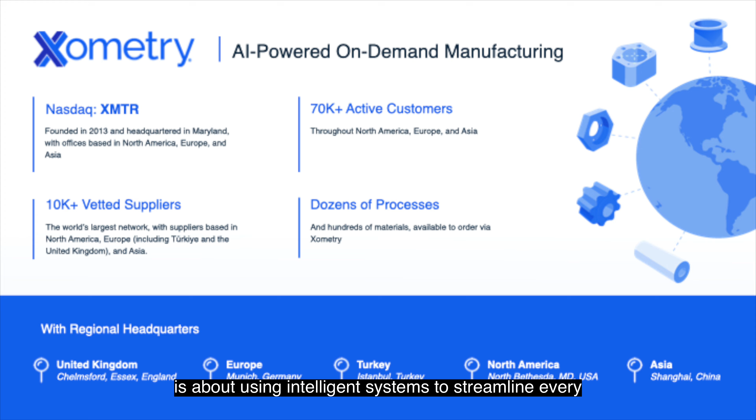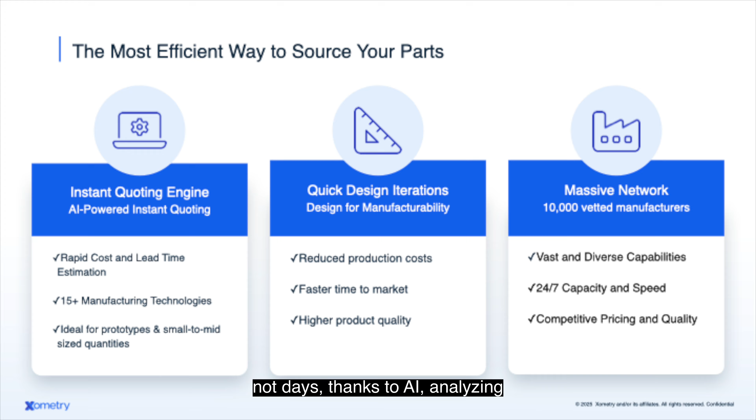At its core, AI-powered manufacturing is about using intelligent systems to streamline every step from quoting complex parts to production of high-volume series production. Platforms like Xometry use AI to connect engineers with manufacturers located all over the globe, making the process incredibly efficient. Engineers can get accurate quotes in seconds, not days, thanks to AI analyzing your CAD files and producing instant pricing based on thousands of historical data points.

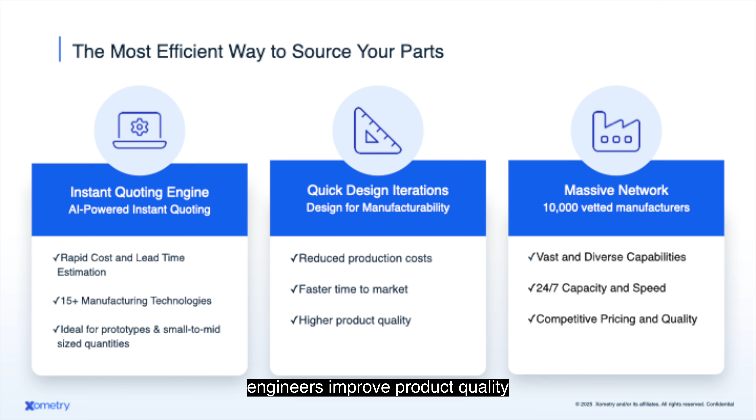AI-powered manufacturing platforms can also help engineers improve product quality and detect and rectify design faults at an early stage with their design for manufacturability feedback.

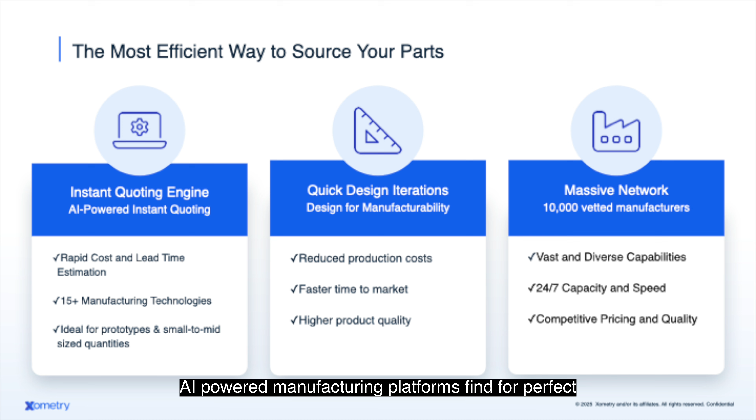AI-powered manufacturing platforms find the perfect partner for your project based on the project's complexity and manufacturer's capability, thus speeding up the lengthy and manual process of finding a supplier.

This isn't just about speed, it's about making smarter decisions that streamline your projects. AI-powered manufacturing frees up engineers to innovate and to focus on designing and engineering their big ideas.

So we've learned about the potential of AI manufacturing, but how do we turn that potential into reality? To answer that question, I would like to share with you the story of the Hilo One e-scooter, a project I'm really proud of, as I was the account manager and played a key role in delivering this successful project.

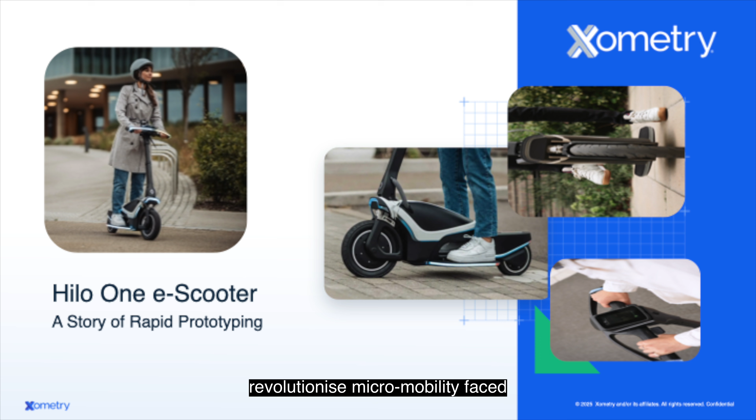Hilo EV, a startup aiming to revolutionize micro-mobility, faced the challenge of producing high-quality prototypes with a tight time frame for a major industry show.

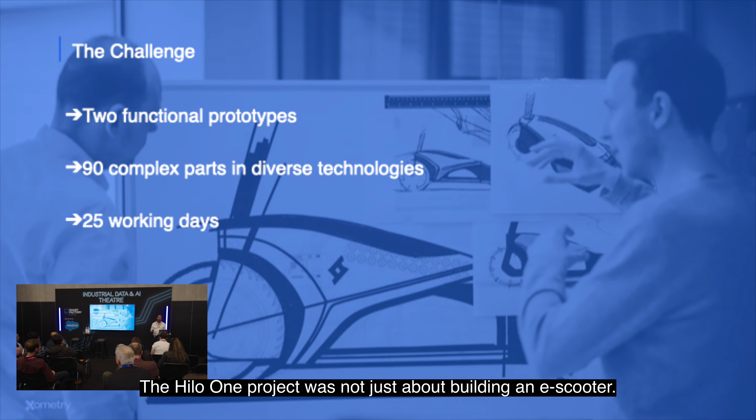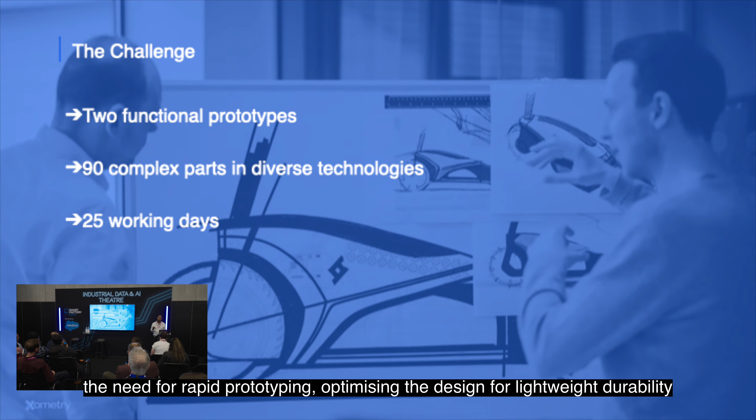The Hilo One project was not just about building an e-scooter, it aimed to create a high-performance solution for urban mobility. The team at Hilo faced significant obstacles, including the need for rapid prototyping, optimizing the design for lightweight durability, and ensuring cost-effective production.

With the goal of unveiling their innovation at a major trade show, they needed to develop 90 complex parts across 2 prototypes in just 25 working days. This ambitious timeline required a new approach to sourcing manufactured parts, one that could accelerate their product from concept to reality.

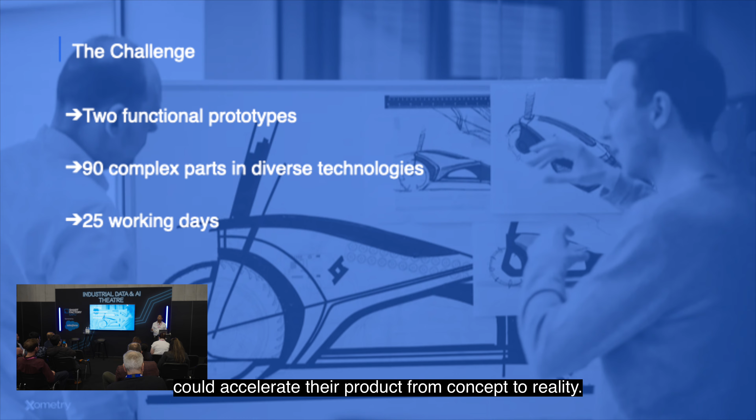The Hilo EV team turned to Xometry, leveraging our AI-powered platform and extensive manufacturing network to instantly connect with manufacturers who possess the right capabilities and experience to produce parts with the high quality and post-processing finishes that they required. By utilizing Xometry's resources, the Hilo team could effectively tackle the complexities of their project and ensure that the 90 parts met their rigorous standards for quality and performance.

This collaboration allowed them to streamline the production process, significantly enhancing their ability to meet tight timelines without compromising on the durability and quality.

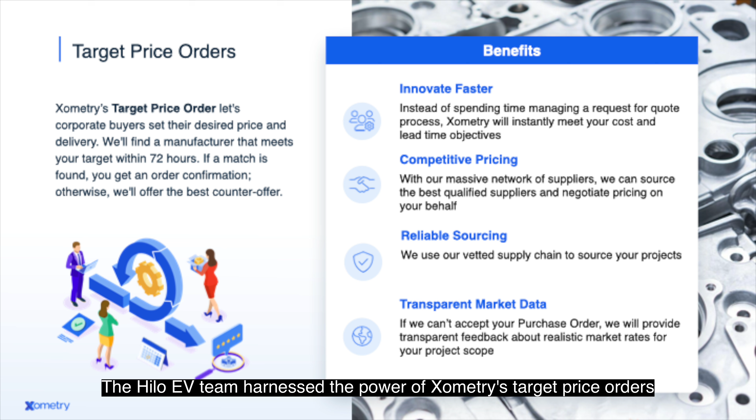The Hilo EV team harnessed the power of Xometry's target price orders, a game-changing feature designed specifically for corporate customers. This tool empowered the Hilo EV team to take the reins, allowing them to set the target prices for their parts and maintain complete control over their project budget.

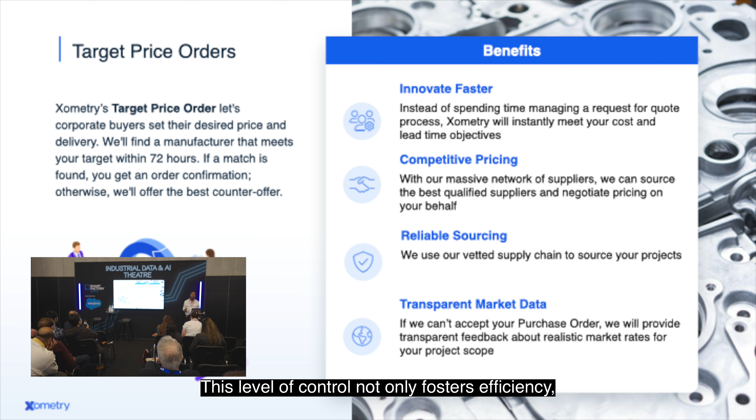Imagine being able to benchmark the cost against market prices from previous projects or competitor offerings. With target price orders, that's not just a dream, it's a reality. This level of control not only fosters efficiency, but also opens the doors for innovation and collaboration in manufacturing.

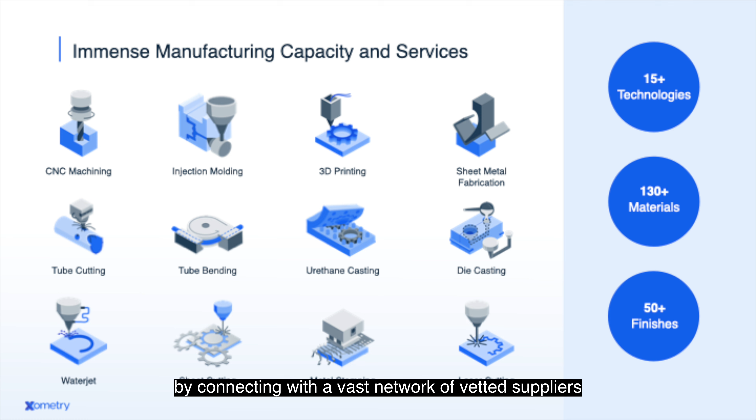The Hilo EV team was able to rapidly prototype by connecting with a vast network of vetted suppliers and accessing multiple advanced technologies simultaneously. With the help of Xometry, the Hilo One e-scooter components were produced using various technologies, including

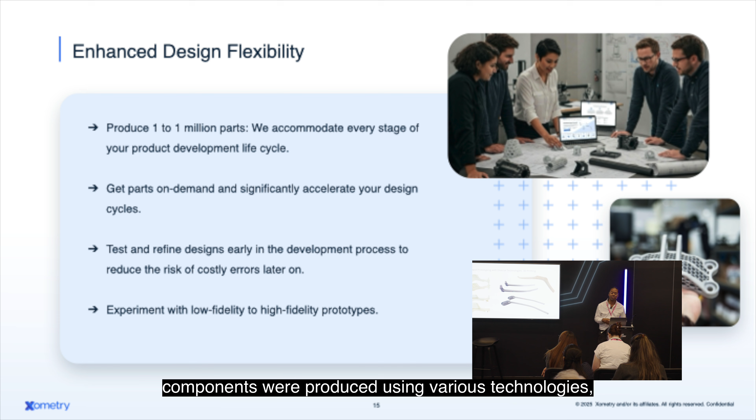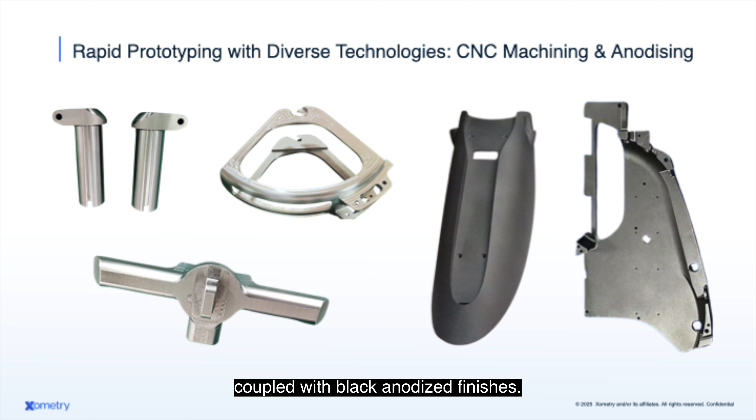3D printing SLA for high-resolution transparent parts, SLS for durable nylon parts, and CNC for precise stainless steel and aluminium coupled with black anodized finishes. Together, these all formed the body of the e-scooter.

So the Hilo EV team came to us with a vision to create not just an e-scooter, but an iconic, dynamic mode of transport. They needed precision, speed, and reliability in their manufacturing process to bring their sophisticated design to life.

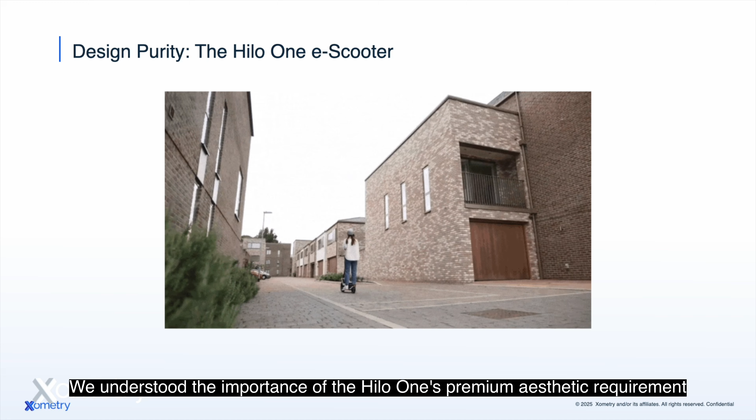We understood the importance of the Hilo One's premium aesthetic requirement and its focus on safety, and we helped them to navigate the complexities of manufacturing, allowing them to focus on what they do best, designing a revolutionary product.

By leveraging Xometry's AI-powered platform capabilities, the Hilo EV team were able to achieve their goal of creating an e-scooter that was not just visually stunning, but also safe and reliable.

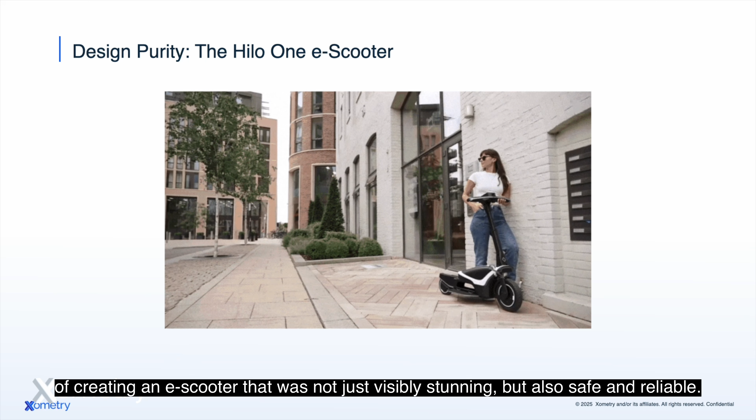We were thrilled to be a part of their journey, and we're committed to continue and supporting innovators like Hilo EV bring their groundbreaking ideas to market.

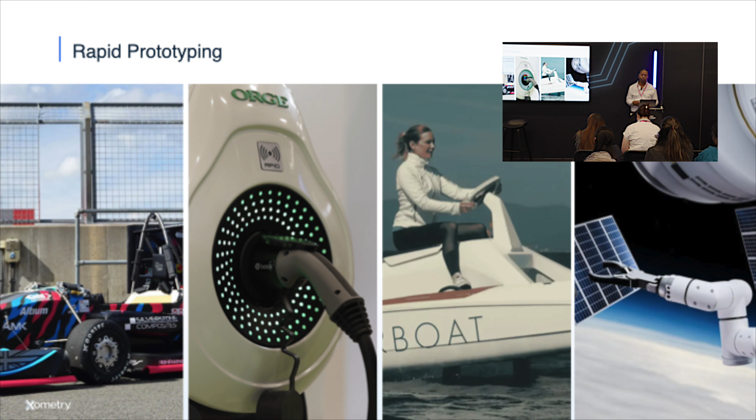Now let's talk about what this means for you, the engineers, and how does AI-powered manufacturing change your day-to-day work? And how does it accelerate your projects? The answer lies in the significant advantages it offers around efficiency.

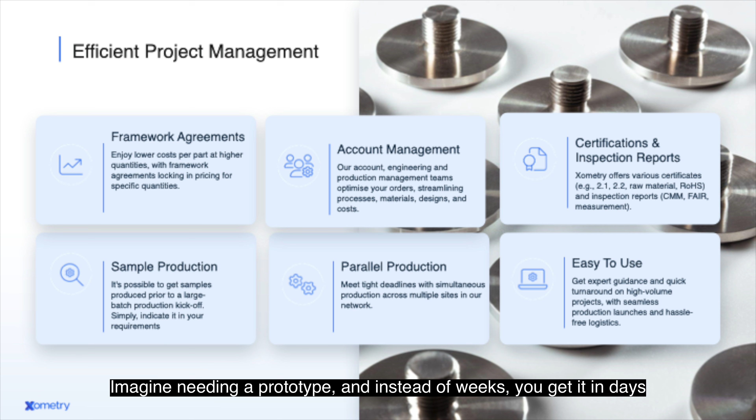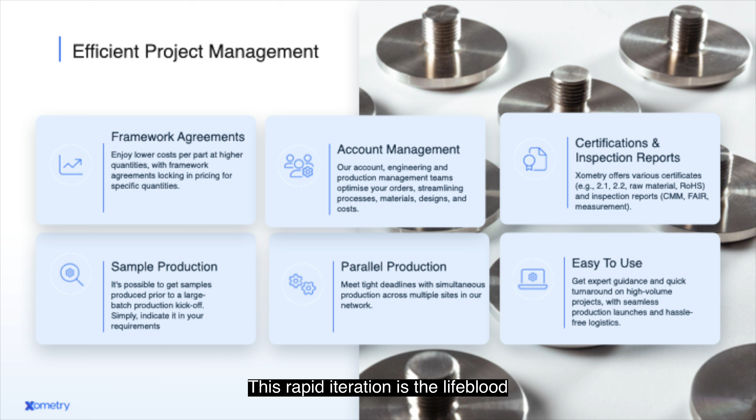Imagine needing a prototype, and instead of weeks, you get it in days, with access to a diverse range of manufacturing technologies like CNC machining, 3D printing, all from a single platform. You can accelerate your prototyping process. This rapid iteration is the lifeblood of innovation, allowing you to quickly test and refine your designs.

So time is a critical factor in any project, and AI-powered on-demand manufacturing platforms streamline project management by reducing lead times through automation and efficient supplier management. With access to over 10,000 vetted manufacturing partners and a dedicated production support team, you can easily manage large-scale projects and achieve faster market entry for your products.

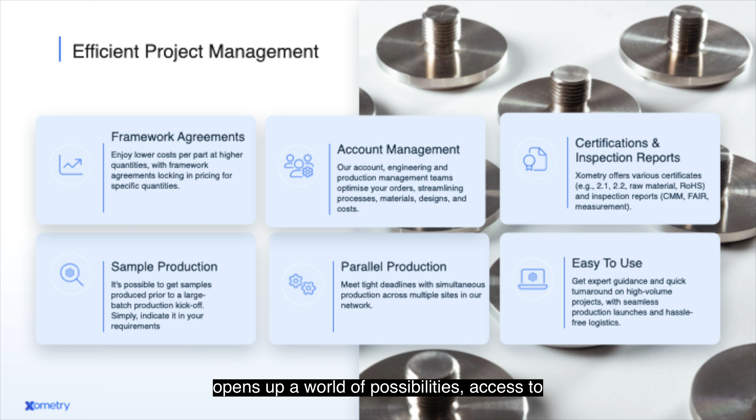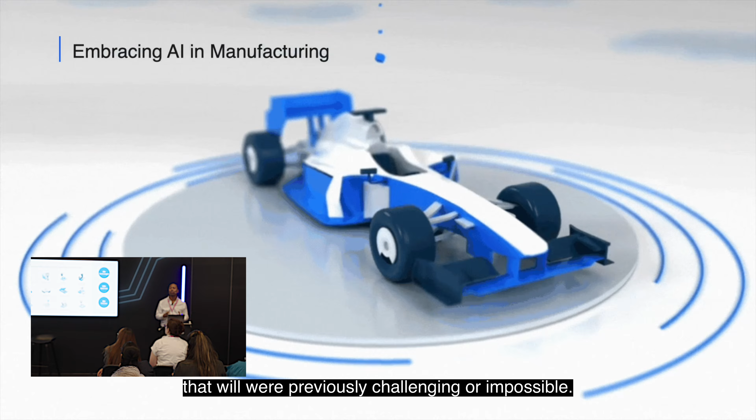AI-powered on-demand manufacturing opens up a world of possibilities. Access to a wide range of materials and manufacturing processes enables you to explore and implement complex designs that were previously challenging or impossible. You're no longer limited to traditional manufacturing constraints.

Ultimately, AI-powered manufacturing empowers you to be more agile, more efficient, and more innovative. It removes all the roadblocks and accelerates the journey from concept to reality. It allows you to focus on what you do best, engineering solutions.

The success of the Hilo One project highlights the transformative potential of AI-powered manufacturing. As AI technologies continue to advance, we can expect to see even greater efficiencies and innovations in the manufacturing sector.

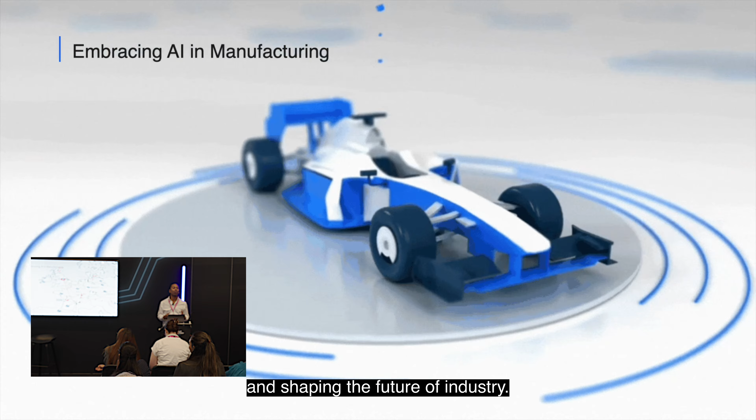I encourage engineers to embrace these technologies, and by embracing these technologies, engineers can unlock new levels of creativity and efficiency, driving innovation and shaping the future of industry. Explore the possibilities of AI manufacturing and leverage these tools to accelerate your own projects. What's your next big idea?